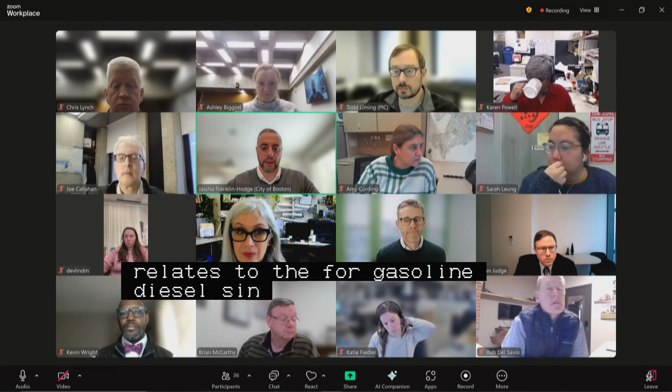Would the proponents please introduce themselves, their affiliations, and give us a very brief introduction to the project and changes as it relates to the pedestrian easement since your new business hearing. This is now 2 separate agenda items for the easement and the specific repairs, so we will start with the easement and then move on to the specific repairs.

All right, thank you, Mr. Chairman, members of the commission. My name is Brian Judge, an attorney with Wilson & Storrs. I'm joined today by Noah Maslin of Eden Properties, Brian McCarthy of RJ O'Connell and Associates, Natalie Adams of Verdant Landscape Architecture, and Rob Del Savio and Katie Fiedler of Embark Architects. Just as a brief reminder, Eden Harvard LLC is proposing a new mixed-use, primarily residential project located adjacent to Harvard Avenue in Allston, with properties having the addresses of 25 to 27 Harvard Avenue, 31 Harvard Avenue, 39 Harvard Avenue, and 410R Cambridge Street. Just by way of reminder, the project obtained Article 80 Large Project Review approval from the BPDA in December 2023.

And zoning relief from the Boston Board of Appeal in January 2024. As was mentioned, we were before the commission for new business 2 weeks ago on January 30th, requesting approvals for pedestrian easement and specific repair. So we'll take each of those in turn.

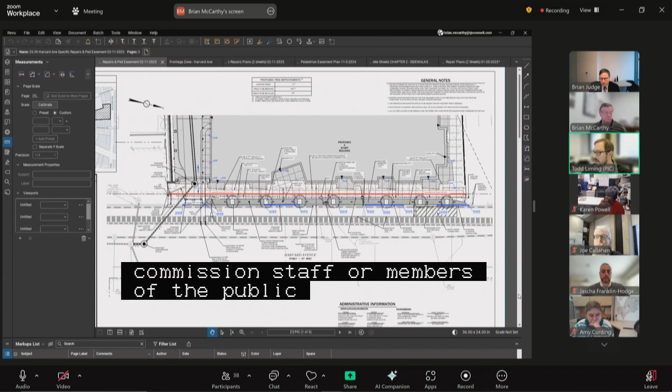All right, hearing none from the commission, PIC staff, or members of the public. I'll take this opportunity to remind the public, if you wish to ask questions or add testimony to any particular action item, we ask that you use the raised hand function at the bottom of your screen. I do not have any comments or questions on this at this time, and I don't see anybody else wanting to weigh in yet either.

So I think we're all set on the easement. All right, hearing nothing else, last call. Do I hear a motion to approve public hearing number 1?

I'll make a motion to approve a joint petition by Eden Harvard LLC, Joseph R. Sullivan 2010 Trust, and 31 Harvard Realty Trust for the acceptance of a pedestrian easement in Harvard Ave, as read into the record by the chair. Second. All in favor? Aye. Aye. Any opposed or abstain? So moved.

All right, on to the second part of this. Public hearing number 2, the joint petition by Eden Harvard LLC, Joseph R. Sullivan 2010 Trust, and 31 Harvard Realty Trust for the making of specific repairs within Harvard Avenue, Public Way, Brighton, located on its westerly side at address numbers 25 to 39, generally between Cambridge Street and Farrington Avenue, consisting of curb and sidewalk reconstruction with structural soil, as well as new and relocated specialty pavement, street lighting infrastructure, parking meters, street trees, irrigation infrastructure, driveway curb cuts, bike racks, and a bike repair station.

This was new business on January 30th, as shown on a set of plans entitled City of Boston Public Works Department Engineering Division Specific Repairs Plan 25 to 27, 31 and 39 Harvard Avenue, and 410R Cambridge Street, Boston, Allston, 2 sheets dated February 11th, 2025. Would the proponents please reintroduce themselves and their affiliations, and then give us an update on the specific repairs and specifically any changes or comments since your new business hearing.

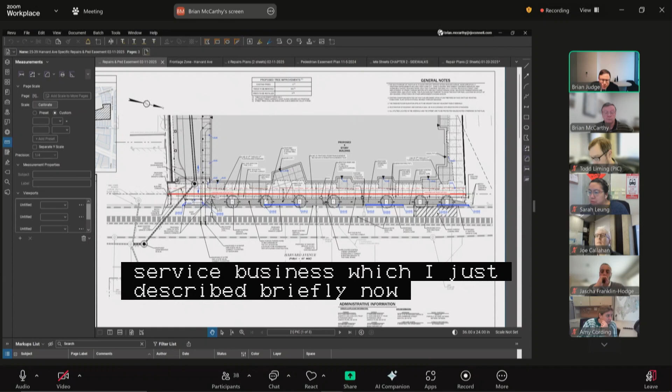So same project as just discussed in connection with the pedestrian easement. In terms of updates with respect to the specific repairs, there have been a handful or so since the new business, which I'll just describe briefly now, and then turn it over to Brian McCarthy to show you in more detail on the plans. So as requested at new business, we replaced the multiple existing parking meters along Harvard Avenue with one multi-space parking kiosk. Second, in response to comments we received from the Boston Parks and Recreation Department since new business, the openings surrounding the proposed street trees have been increased.

So with that, I'll turn things over to Brian McCarthy, again, just to walk you through the changes in more detail. Yep, Brian McCarthy again with R.J. O'Connell and Associates, Civil Engineers. So the first item was replacing the existing 4 meters with a multi-space parking kiosk. We show the location on the plan here, right in this location. And we have a note here that this will be coordinated with Boston Transportation Department during construction. So final location will get coordinated, but we show it here for now.

The other item added here was a bike fix-it station, and that's going to be right in this location here, in the furnishing zone, along with the bike racks that are all along the furnishing zone. The increase in the size of the openings in the pavers at the new street trees, that went from 2 feet square to a 3 foot by 4 foot opening as requested by Parks and Recreation Department. So those are indicated by the white rectangles here in the paver areas at the trees. So that now is 3 feet by 4 feet of an opening.

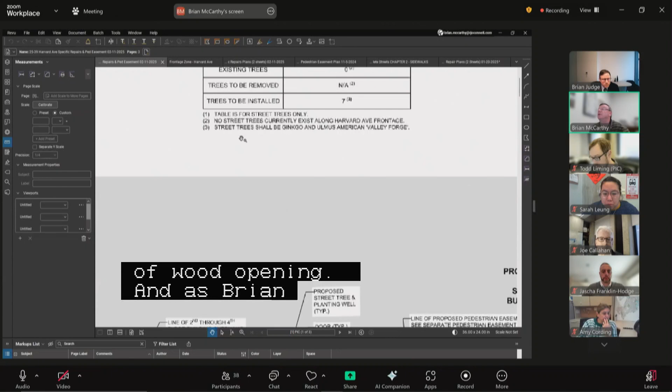And as Brian mentioned, at the request of Parks and Recreation, we added the tree species onto the plan here. We've got ginkgo and Ulmus American Valley Forge as the trees that are proposed, and they are on the city's approved list. So that's pretty much the changes made since the last meeting. Thank you very much. Commissioners, questions, comments?

All right, hearing none. PIC staff or members of the public? I'm all set on this. I appreciate the project team taking the time to meet with us last week to finalize some of these details. I see no one else. All set. All right, excellent.

Thank you very much. Do I hear a motion to approve public hearing number 2? I'll make a motion to approve a joint petition by Eden Harvard LLC, Joseph R. Sullivan 2010 Trust, and 31 Harvard Realty Trust for the making of specific repairs within Harvard Ave, as read into the record by the chair. Second. All in favor? Aye. Aye. Aye. Any opposed or abstain? So moved. We are all set. Thank you very much. Thank you.

All right, moving on to our next item, public hearing number 3 on a petition by the Massachusetts Bay Transportation Authority for the making of specific repairs within the following public ways in Boston proper and Roxbury, consisting of curb realignment, roadway and sidewalk reconstruction, as well as new and relocated pedestrian ramps, street lighting infrastructure, traffic signal infrastructure, storm drain infrastructure, street trees, bike racks, trash receptacles, bollards, wayfinding signage, and grade-separated bike facilities. Massachusetts Avenue, generally between St. Stephen Street and St. Paul Street. Huntington Avenue, generally between Public Alley number 405 and Public Alley number 820. This was new business on January 30th, as shown on a set of plans entitled City of Boston Public Works Department Engineering Division Specific Repair Plan, Massachusetts and Huntington Avenues, MBTA Symphony Station Improvements, Public Way, Boston, 8 sheets dated February 10th, 2025. Would the petitioners please introduce themselves, their affiliations, give us a very brief reintroduction to the project, and then any updates on the specific repairs component of this.

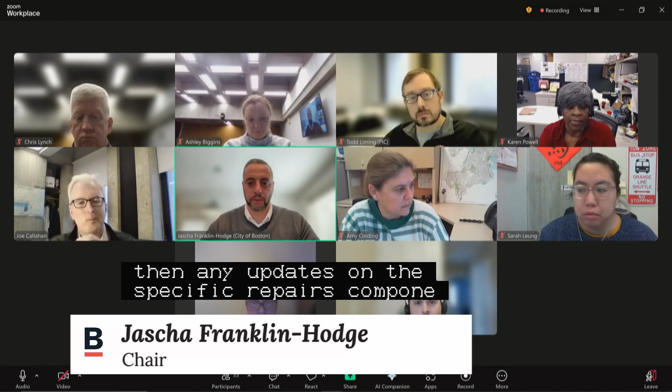There are, I believe, 3 actions related to this project on the agenda, so we'll take them one at a time, but we can start with those specific repairs.

Good morning, Commissioners. My name is Dino DiFronzo Sr. I'm the Municipal Liaison for the MBTA Symphony Station Project Phase 2. Joining me is Judd Galloway from Thornton Tomasetti. As we told you a couple of weeks ago, Phase 1, which consists of the utility relocation work, is scheduled to be completed this spring. And Phase 2, which consists of station improvements and surface improvements, is anticipated to start this summer.

There were a couple of questions at the last hearing, I believe from Sarah at Commission on Disability, and the project team has verified the ADA compliance of the sidewalks and curb cuts on the Huntington Avenue overpass, and Phase 2 will replace the 4 detectable warning strips at the curb cuts on the Huntington Avenue overpass. I also coordinated with Chung Lu on some actions that need to be taken after the approvals, and have coordinated with Todd in his office. So with that, I want to pass it on to Judd Galloway for any specific information on the first item, which is specific repairs.

Thank you, Dino. Good morning, Commissioners. As Dino mentioned, my name is Judd Galloway. I'm with Thornton Tomasetti. I'm the project manager and project prime for the design team on this MBTA station improvements project. I'll share my screen to show the specific repairs. Can everyone see my screen? Yes, we can. Okay, so this is the specific repairs project for the Symphony Station's improvements project that, as the commissioner noted, includes surface improvements for new elevators, improved stair access, emergency egress stairs. Other specific repairs include new street lights, new traffic light signage, new utility relocations, etc.

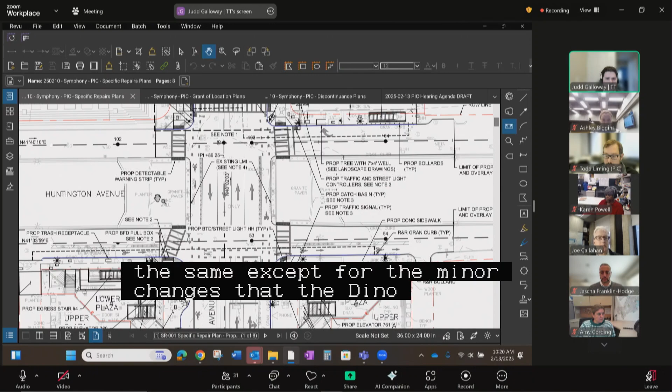The specific repair plan remained the same except for the minor changes that Dino just mentioned. We have indicated now that we will be replacing the 4 detectable warning strips on the overpass at Huntington Avenue. Other than that, the plans did not change from our meeting on January 30th. All right, thank you very much. Commissioners, questions, comments?

Hi, I'm Sarah Leung with the City of Boston's Disabilities Commission. Appreciate the project team looking into our comments and proposing those changes to replace the detectable warnings. I just asked the team to coordinate with our Public Works ADA coordinator and manager on the compliance of those ramps after the PIC hearing, just to ensure that our records match your records as well. We'll do, Sarah, not a problem.

All right, so I wanted to just flag the wayfinding signage piece of this. I think that we will, at a minimum, need an LMI to cover the wayfinding, since that's a non-standard thing for the city to be responsible for maintaining. And we probably want to talk about the other infrastructure here that is possibly something the city can commit to maintaining, like bike racks and trash receptacles, but depending upon the precise details of what's being installed and where, we may need to come to some understanding about what the city's responsibility is and what the MBTA's responsibility will be going forward.

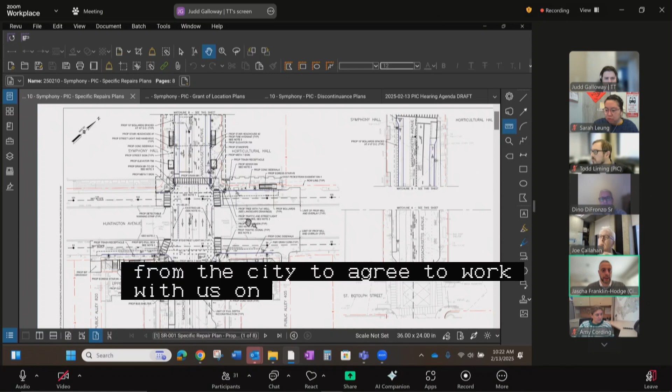So can I get a commitment from the T to agree to work with us on an LMI for, at minimum, the wayfinding signage, and to at least entertain a discussion as part of that about the other street furniture elements? Absolutely, Chief.

And I'll be meeting with Chung Wu next week anyway. I can start the ball rolling with Chung and Todd on the wayfinding piece, the LMI, and I'll keep you updated before anything is locked in. All right, that sounds great.

Much appreciated. Yeah, I think as I'm looking more closely, there's bollards, there's street trees, so we just need to make sure we're aligned on all of those elements and long-term maintenance. There's a lot happening in a very small area there, so I agree.

Very true, very true. All right, hearing any other questions from the commission? All right, PIC staff or members of the public?

No, I'm all set. The signage, the bollards, those I think are definitely going to need to be in the LMI. The tree will be up to the Parks Department, I think, but Dino and Judd, I'm happy to work with you, and Chung, after this hearing to figure out all that stuff. Thank you, Todd.

Hi, this is Christian Simonelli, Executive Director of the Groundwater Trust. Dino, good to see you. Christian, always a pleasure. Always a pleasure, my friend.

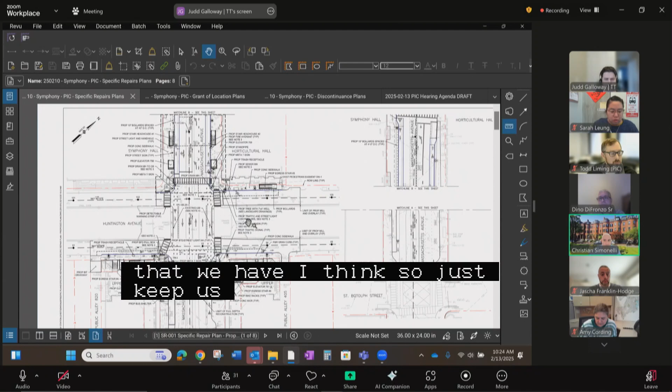It looks like some of the area that you're doing the work in contains some observation wells that we have, I think. So just keep us in mind when you're out there resetting those roadway boxes. Some of these roadway boxes are pretty old, coming up on 20 years, so there may be a case where when you go to place them back, they may just be too far gone, and we can certainly replace those and get those replacements out to you. So I would just encourage keeping an open dialogue with us as you're going through the work, and if you do need it, we'll get it right out to you.

Christian, how about you and I meet up next week and we can go over the plans and the project? Sounds good to me. All right, thank you. Thanks very much. Thank you, Chief. Thanks, Christian. Good to see you.

All right, hearing nothing else, do I hear a motion to approve public hearing number 3? I'll make a motion to approve a petition by the Massachusetts Bay Transportation Authority for the making of specific repairs in Massachusetts Avenue and Huntington Avenue as read into the record by the chair. Second. All in favor? Aye. Aye.

Any opposed or abstain? So moved. On to public hearing number 4, on a petition by the Massachusetts Bay Transportation Authority for a grant of location to relocate existing utility infrastructure within the following public ways in Boston proper and Roxbury: Massachusetts Avenue, generally at Huntington Avenue; Huntington Avenue, generally at Massachusetts Avenue.

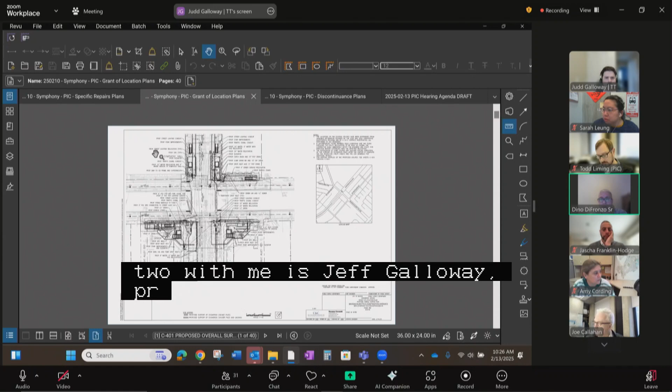I am the municipal liaison for the MBTA Symphony Station Project Phase 2. With me is Judd Galloway, the project manager for Thornton Tomasetti. I don't believe there has been any changes, but I will pass it over to Judd so he can give you the answer definitively. Good morning again, Commissioners.

This is again related to the Symphony Station Improvements Project by the MBTA. And as Dino mentioned, there have been no additional changes to the grant of location plans from our new business hearing on January 30th. All right, well, given that, Commissioners, any questions or comments? PIC staff or members of the public?

I will just mention, I had previously asked for some additional information to be added to this plan set that resulted in a 40-sheet set, which I think is maybe a little much, so we can pare down the sheets in this plan set and figure out which sheets we actually need to record. So I don't think we're going to need all 40.

So Todd, sorry about that. We'll get you just what you need. No need to apologize, I asked for it, so I got what I asked for. If it's okay with you, I'm going to blame Judd for that, all right, Todd? We're going to blow through our signing pen budget at this rate.

All right, do I hear a motion to approve public hearing number 4? Make a motion to approve a petition by the Massachusetts Bay Transportation Authority for a grant of location in Massachusetts Avenue and Huntington Avenue as read into record by the chair. Second. All in favor? Aye. Aye. Any opposed or abstain?

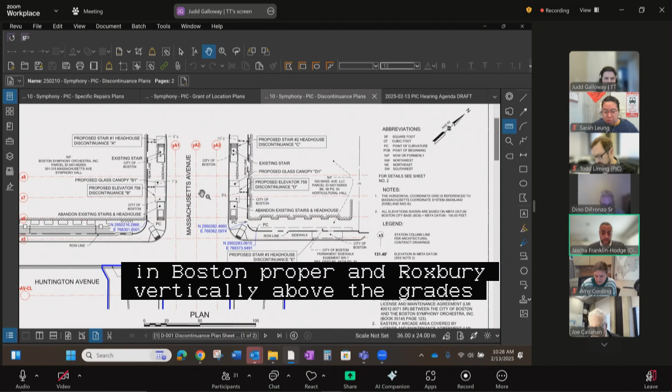So moved. All right, on to public hearing number 5 on a petition by the Massachusetts Bay Transportation Authority for the vertical discontinuance of portions of the following public ways in Boston proper and Roxbury, vertically above the grades of the sidewalks: Massachusetts Avenue on both sides, generally northwest of Huntington Avenue; Huntington Avenue on its northwesterly side, generally northeast of Massachusetts Avenue. This was new business on January 30th, as shown on a set of plans entitled City of Boston Public Works Department Engineering Division Discontinuance Plan, Massachusetts and Huntington Avenues, MBTA Symphony Station Improvements, Public Way of Boston, 2 sheets dated February 10th, 2025.

The proponents please reintroduce themselves, their affiliations, and give us an update on anything that has changed since your new business hearing. Good morning, Commissioners. My name is Dino DiFronzo Sr. I'm the municipal liaison for the MBTA Symphony Station Project Phase 2. And with me is Judd Galloway, project manager for Thornton Tomasetti. I don't believe there have been any changes from the new business hearing concerning vertical discontinuance, but I'll pass it over to Judd so he can definitively agree or disagree with me.

Thank you, Dino. Again, Commissioners, good morning. My name is Judd Galloway. I'm with Thornton Tomasetti, the project manager from the design team for the MBTA Station Improvements Project. I confirm what Dino said. The 5 discontinuances that we had proposed in our January meeting for new business have not changed and are shown on the screen here.

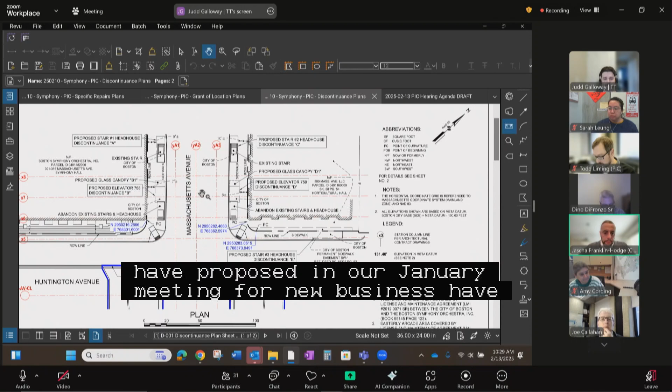Thank you very much. A question about, so two of the head houses are currently being abandoned that are being shown on this plan. Can you speak to what is happening below grade at those locations and how that is being handled from the proponents' understanding in terms of any existing discontinuance that may be by explicit grant or just by existence of a structure there, how that is being handled going forward with the abandoned locations.

Absolutely. So as you noted, we are abandoning these existing stair head houses that occur at the corners of Mass Ave and Huntington Ave at the BSO and Horticultural Hall. These stairs will be completely demolished in order to make room for the station's expansion required for the new elevators just to the north. So we are asking that the discontinuance of the property to the north of the existing head houses at these locations, where the abandoned stations will be restored to sidewalk and to the city.

Other than that, below grade, there should be no, there will be station expansion that is probably, I think, 8 feet below the sidewalk at this location for these head houses. But above grade, it will be restored to sidewalk.

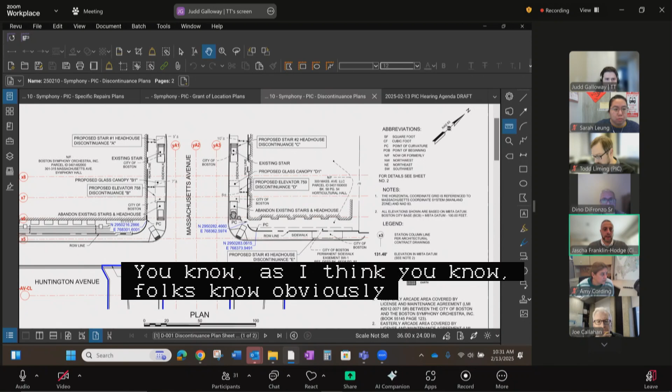So there's a larger issue here that I want to raise and maybe ask a specific question in the context of these particular locations. As I think folks know, obviously the MBTA has quite a bit of underground infrastructure in Boston, and some of it runs underneath sidewalks and streets that the city has generally been responsible for maintaining.

Given the age of this infrastructure, much of it predating the PIC process, we don't have well-kept records of where that infrastructure was located, or clear discontinuance records or other examples of having tracked the history of that space over time. This creates a challenge for us because we are charged with maintaining sidewalks and streets that sit above these pieces of underground infrastructure, and absent clear maps and documents, absent clarity on responsibilities for maintaining those subgrade structures, it can be very difficult for us to do even simple things like repairing a sidewalk, because we do not always know what is directly underneath it and the condition it's in.

What we are trying to do as a city is ensure that when there are structures below grade, areaways, or other things, as new projects come through that touch on the top side or add new discontinuances, we're formalizing maintenance responsibilities for the subgrade structures in an LMI. This ensures the city can do necessary topside maintenance work and that there's clarity on who is responsible for the below grade structures supporting whatever maintenance is needed on top. That's a big problem, and it's citywide, not just specific to the MBTA, but something we're trying to move forward with across the city.

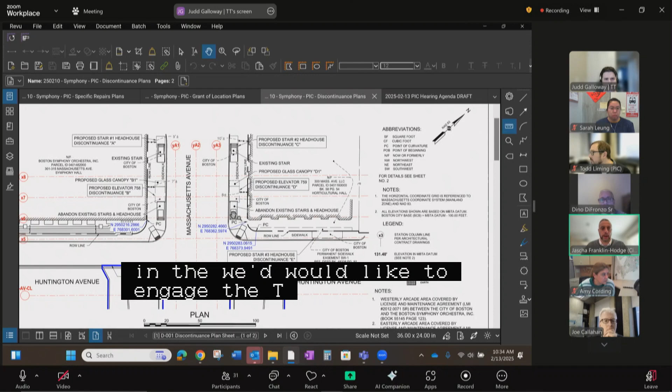My ask here is twofold. One, the city and the PIC would like to engage the T in a discussion about this broader issue in particular locations where the T has underground infrastructure impacting sidewalks, streets, and curb ramps. But the more specific ask in this location is whether we can discuss with PIC in areas where there's an abandoned structure or discontinuance that implicates a sidewalk the city would subsequently maintain, can we create an LMI spelling out the T's responsibilities for maintaining the subgrade structures so the city can perform necessary maintenance above ground? That was a long spiel, but I wanted it on the record and to confirm the T is willing to work with us on this going forward.

Chief, I'll get that to the appropriate MBTA department, and I don't see why the T wouldn't work with the city on this. So I'm going to say yes.

Okay, excellent, I appreciate that. This is something of a bigger and broader ask, so I feel comfortable moving ahead with this particular action at the PIC. I would ask that we take a focused look, particularly where we're abandoning existing infrastructure while maintaining a below-grade presence, and try to formalize the maintenance responsibilities in an LMI, but given the existing precedent, I'm comfortable moving ahead with this action today.

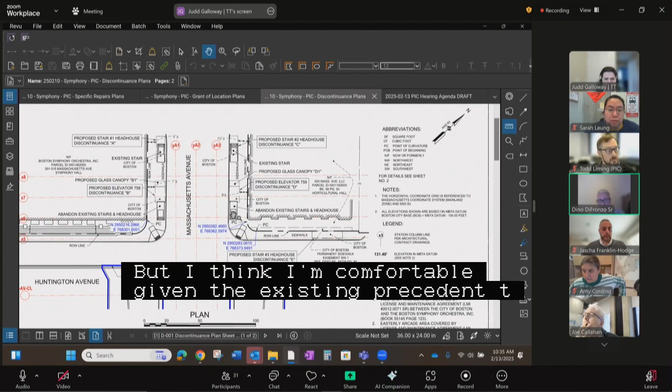We'll work on that separately. And Chief, if we could have a follow-up meeting too, because I'm not sure it's the capital delivery department that would be responsible for the engagement with you. I'll definitely get maybe the real estate department, I'm not sure, but I will track down the appropriate department. All right, much appreciated.

Commissioners, other questions, comments on the vertical discontinuance? One question related, Chief, to your comment about the LMI and maintaining a below-grade structure. Will the LMI cover snow and ice clearing and removal once this project is complete? Who is responsible for the snow and ice removal in this area?

Judd, we'll be taking ownership of the discontinued areas. I think the MBTA of the discontinued areas, yes. Absolutely, so the MBTA will own these discontinued areas, so I would imagine the MBTA would be responsible for that.

And Joe, I was anticipating that question for you after the Chief's talk, because of Government Center Station, so I knew you were going to ask that. Thank you for the answer. It's a high traffic area, a lot of pedestrians, and we want to make sure it's safe. Thank you. Yep.

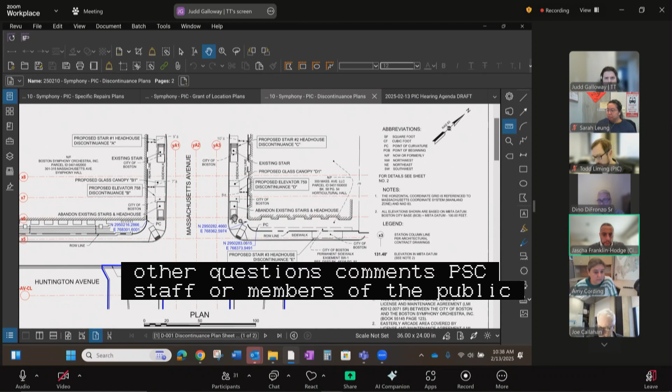I'll make a motion to approve a petition by the Massachusetts Bay Transportation Authority for the vertical discontinuance in Massachusetts Avenue and Huntington Avenue as read into the record by the chair. Second. All in favor? Aye. Aye. Any opposed or abstain? So moved. Thank you very much. Thank you, everybody. Thanks, Dino. Thanks, Judd.

All right, moving on to our final public hearing, public hearing number 6, on a petition by Verizon New England Incorporated for a grant of location with lead company status and no participants to install new telecommunication infrastructure with city shadow conduit within Armandine Street, Public Way, Dorchester, located between address number 41 and Washington Street. New business on January 30th, shown on a plan entitled City of Boston Public Works Department Engineering Division Grant of Location Plan, 41 Armandine Street, proposed conduit installation, one sheet dated December 2024. Would the proponents please introduce themselves, their affiliations, and give a brief reintroduction to the project and any changes since your new business hearing.

Yes, good morning. Ross Billadu representing Verizon New England. I'm going to go ahead and share my screen here.

Okay, just making sure everybody can see that. Yes, we can. Very good.

Just a quick overview. Verizon is proposing to place 318 feet of new conduit from our existing manhole 49A, located at the intersection of Washington Street and Armandine Street, to an existing Crown Castle shared handhole, to provide fiber services along Armandine Street. There have been no changes to this plan since the last hearing on January 30th. We do acknowledge that we will need to work with the Commission for Persons with Disabilities if any handicap spots are affected by this work.

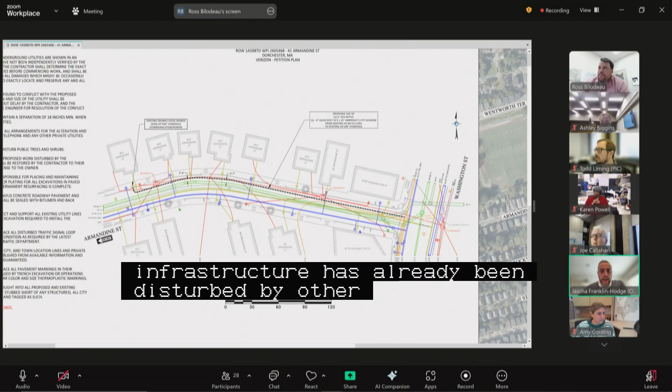There are speed limit pavement markings at the head of the street at Washington that have been obliterated, and there is at least one speed hump that would be traversed by this conduit run that has already received some damage as a result of past utility work, possibly two humps along the conduit run. I've not mapped it exactly. So the ask here is two things.

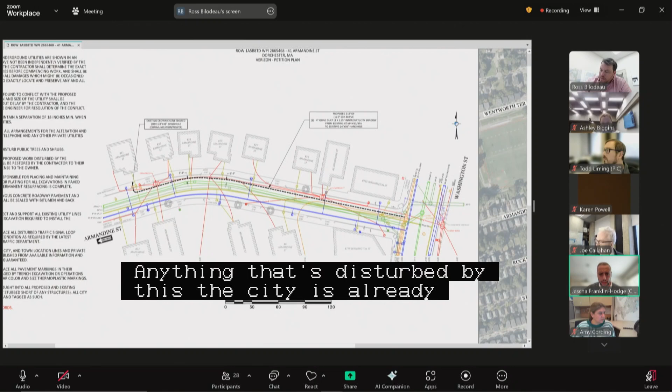First, that Verizon work with the city to receive a copy of all the pavement marking plans associated with the traffic calming that was installed here, and ensure that everything is restored fully to its intended configuration. Anything disturbed by this, the city is already planning to repaint those speed limit markings, and I'm not exactly sure where they land in the roadway relative to your conduit run, but it's likely they may be disturbed again depending upon the timing of when you do this. So making sure all those markings are fully restored.

And then for the speed hump, the city is in the process of developing formal restoration standards for speed humps. But we would like to ask that in this case Verizon commit to fully rebuilding the speed hump or speed humps impacted by this project, to ensure they are built in a consistent way and continue to function in their intended manner.

Okay. Well, sure, I wasn't privy to any of that information, so I appreciate you bringing it to my attention. I suppose if that's what we need to do to get this project approved, then I need to commit to that, so I can bring those items to my contacts running this project and make sure they abide by that. But again, I wasn't aware of any of that information prior to you telling me.

Yeah, fair enough. So I think from my perspective, I'm happy to advance this with a conditional approval on the restoration piece of this. I would also ask that we update the plans being submitted to the PIC to show speed humps. This is, again, a place where the city has a responsibility to update our standards, and this will become something we ask you and other utilities to do as a matter of course on your future plans, in the same way we ask you to show curb line and other constructed elements on the public right-of-way. Speed humps, because they are physically constructed items, do need to be shown going forward on the plans.

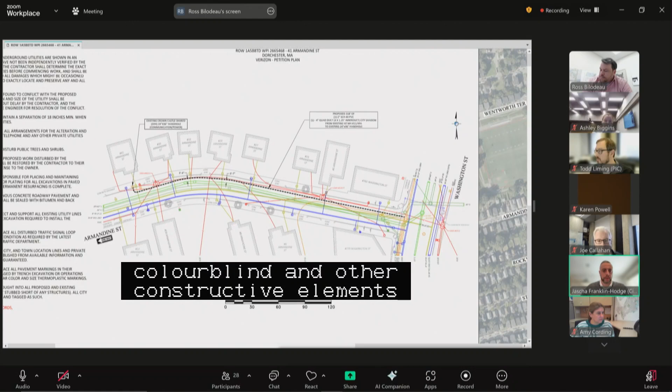Obviously that's new, we had not previously asked you for that, but we would just ask, in addition to that commitment, that you give us updated drawings showing which hump or humps are affected by this, and a notation about their restoration, before we file everything. Sure, makes sense to me, I'll make sure they start adding those. Thank you. All right, much appreciated.

Commissioners, other questions, comments? All right, hearing none. PIC staff or members of the public? No, we're all set. Thank you.

All right, do I hear a motion to approve public hearing number 6? I'll make a motion to approve a petition by Verizon New England, Inc. for a grant of location in Armandine Street as read and seconded by the chair. Second.

I'll just note that this is conditioned on the elements we just discussed about restoration and updating plans.

Do I hear all in favor? Aye. Aye. Aye. Any opposed or abstain?

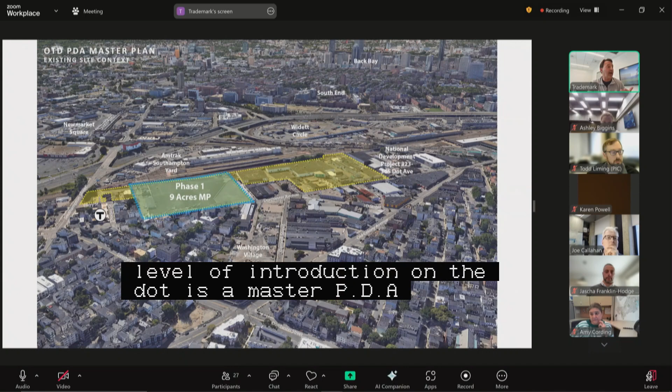Hopefully you're seeing my screen. Very high-level introduction: this is a master PDA approved by the Planning Department, covering approximately 21 acres on the western side of Dorchester Avenue, immediately north of Andrew Square Station. The project was proposed in 4 phases.

The first phase, which we're talking about today, encompasses 9 acres, again on the western side of Dorchester Avenue, and 4 buildings. The first building is 495 Dorchester Avenue, a residential building. Then there are 3 commercial buildings: 505 Dorchester Avenue, and 75 and 65 Ellery.

Within that 9 acres, those 4 buildings have gone through the development plan process and also been approved through the Planning Department for Article 80 and Article 37. Our commitment to the Planning Department was to build and receive a certificate of occupancy for a residential building first, before proceeding with any of the commercial buildings.

So our first project is the 495 Dorchester Avenue residential building, encompassing approximately 320 residential units, including 94 senior affordable housing units within that project. The specifics involve work in Dorchester Avenue, Alger Street, the creation of a new Ellery Street, and some adjustments to the surrounding public realm space.

That's a very quick, big picture overview, and I'm going to turn it over to Kevin Wright at VHB to walk you through the details of our proposal.

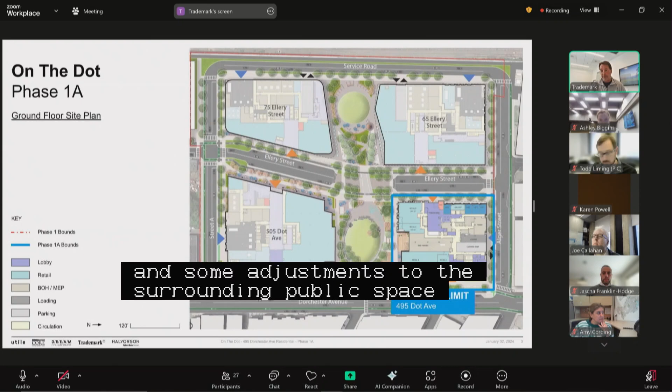Thank you very much, Mark. I'll share my screen as well. So, yes, we have mailed out our necessary — good morning again, sorry, Kevin Wright from VHB, as Mark said — we mailed out the necessary engineering reports, utility notification letters, and plans necessary for the utility agencies to review.

We've gotten all of our comments back, and with several agencies we've had meetings, including the Commission for Persons with Disabilities and BPDA, and we've met extensively with the street lighting department to talk about layout of street lights. We've also addressed comments that have come in and responded to those items, and developed these engineering plans, which I'll walk you through one at a time.

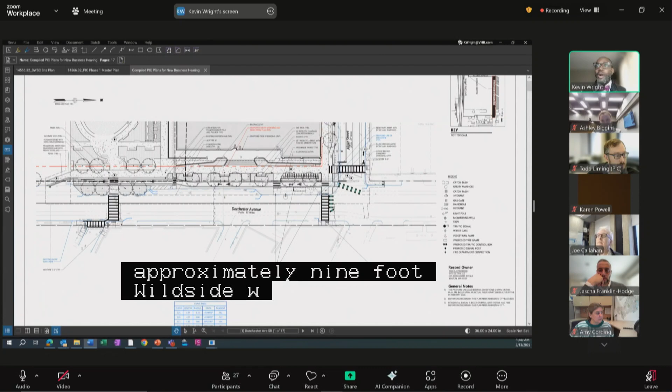We'll start with the specific repair plans. What you see right now is the specific repair plan for Dorchester Avenue. There are existing 8-foot wide sidewalks out there. The specific repair plan lays out an extension of 20 feet beyond the existing property line to provide a 6-foot bike lane, 12-foot furnishing zone, and approximately 9-foot wide sidewalk, giving an 80-foot right-of-way on Dorchester Avenue. Streetlights, sidewalks, and crosswalks will all be city standard materials, with a number of trees, bike racks, and seating elements planned for this portion of Dorchester Avenue.

At this time, do you want me to continue walking through the specific repairs for each street? Yeah, that would be great if you can just walk us through, and then we can jump back if there are specific questions. Okay.

So that's Dorchester Avenue. There are crossings planned across Dorchester to tie into what is known as East Park, which would be adjacent to the 495 building, shown here in this portion of Dorchester Avenue.

Next, we'll walk through to Alger Street, which is perpendicular to Dorchester Ave. Alger Street also has an 8-foot wide sidewalk adjacent to the existing property. With the new right-of-way that we're presenting, we're pushing it back 17 feet to provide a 5-foot wide bike lane, 5-foot wide furnishing zone, and a 9-foot wide sidewalk, giving a 67-foot total right-of-way. There are also bike rack elements and street trees along this stretch of Alger Street, and a Hubway or Blue Bike Station will also be incorporated.

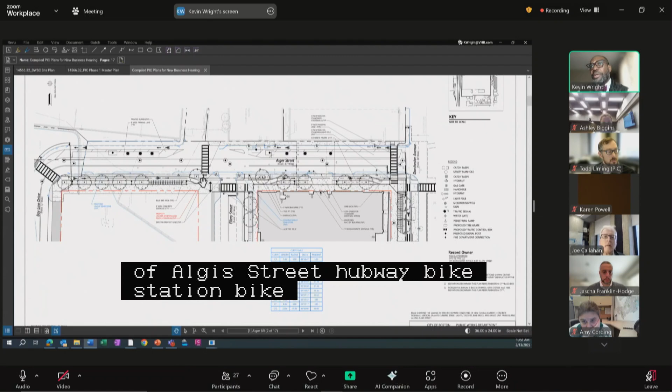Per our conversations with the Commission on Disabilities, we've added this crosswalk element at Alger and Ellery. We've repositioned this since the initial plans went out in October to better align the crossing and line up a pedestrian path continuous along the Dorchester Ave frontage.

The next is Ellery Street. Ellery Street is a new street which would have a total right-of-way of 83 feet. We've got a number of elements going on here, including 8-foot parking lanes on each side and 11-foot travel lanes.

The south side of Ellery Street has street trees, bike racks, and elements that are all going in with the 495 building. Per our meeting with the Commission on Disabilities and the BPDA, we've changed this crosswalk alignment and straightened it out, giving it a little bit more width than what was initially presented in the plans that went out in October.

We've also provided a turnaround for Ellery Street on this plan so that it does not terminate on a space that cannot get out and get back to Alger Street - the city has a turnaround element for this. You'll notice that we have bituminous called out, and per our conversations with the PIC staff, this is due to the fact that...

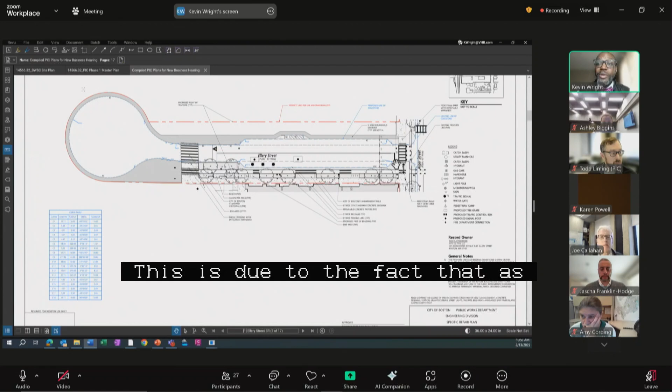As Mark showed in the master plan slides, the 65 Ellery building would be going in and would be constructed, and therefore that portion of the street and trees and elements related to specific repairs would come back at a future date when that building design is finalized.

Our last specific repair is tied to Bay Line Drive, which is just north of Ellery Street, opposite Alger, adjacent to the MBTA tracks and property line. This would have all bituminous pavement, curb, street lighting, two 11-foot travel lanes, and a 10-foot wide multi-use path. We've got a safety buffer zone along this stretch of Bay Line Drive to separate the multi-use path.

We have a configuration that allows pedestrians and bikes to get across and up to the multi-use path. We also present this turnaround, the same as what was on Ellery Street, to provide an element for getting out and around Bay Line and back onto Alger Street.

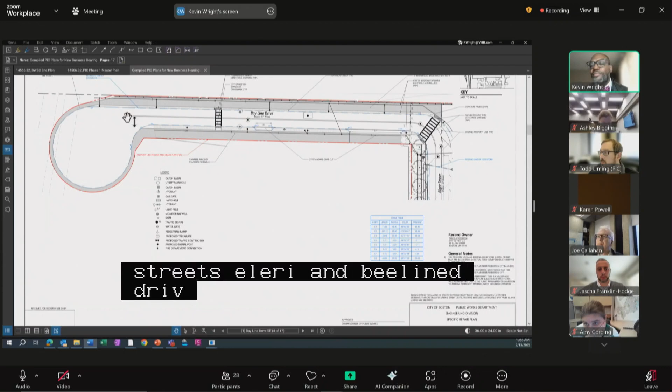In the larger scale master plan, these streets, Ellery and Bay Line Drive, extend further to the west, or Plan West, and we'll come back at a later date when those developments are ready to come forward to the PIC staff. With that is the specific repair actions. Are there any questions?

Thank you very much, Kevin. I know that there's quite a few actions beyond the specific repairs associated with this. Given the scope and scale of the project, maybe we can start with any discussion on specific repairs, and then have you come back and walk through all of the other actions associated with this, since there's quite a lot of detail in here. So I will open it up to the commission for comments and questions on the specific repairs.

All right, very good. I have a couple of questions. On Alger Street, you're showing a sort of fully constructed new southern curb with a sidewalk zone, bike lanes, and all of this other infrastructure. The northern side of the street is showing what appears to be just paint and maybe a flex post separated bike lane, but no significant changes to the sidewalk. Can you explain the intention there, and what should be anticipated for future developments on the northern side of Alger Street?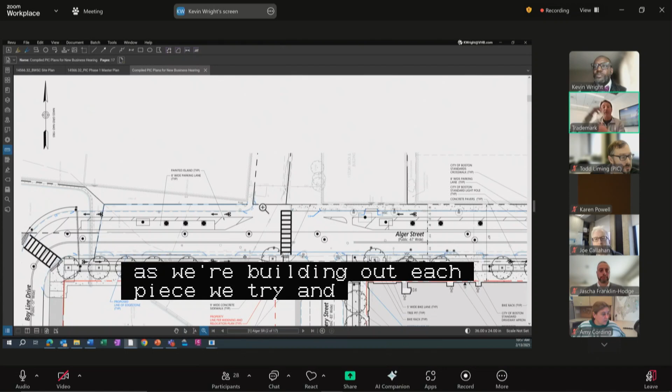So the development as a whole, as I mentioned, is 4 phases across a significant area, and as we're building out each piece, we try to manage the side of the street so as not to build new sidewalk or new trees that we would then have to tear out when we build on the other side of the street. That's why, as you saw, we're doing bituminous on Ellery between 45 and 65, so that when we build the next building, we're not spending more to throw away something that's finished. In this case, there is an existing industrial user on the other side, Karas and Karas Glass. The city, working with the Planning Department and Transportation, had talked about the complete street that is Alger, but that should not and cannot actually be installed because we don't own the property and the rights on the far side.

So we're leaving the existing sidewalk condition, which they use today. They load across it, right? Karas and Karas needs to continue to operate and fully function until such time as that industrial building gets removed, redeveloped into a new building, and then the other side of Alger Street would be brought to the equivalent level of finish that we're showing on the 495 side. So there is an expectation of a mirror image level of finish and detail and street trees.

It's just that we're phasing it, and really only able to control the southern half of Alger Street because there's a different property and a different use on the other side in the temporary condition. It's the same answer for why there's this slightly odd crossing at Alger Street. The existing public street ends, it sort of dies off today, so we want to clean that up in the interim, but ultimately the goal would be that sidewalk would continue.

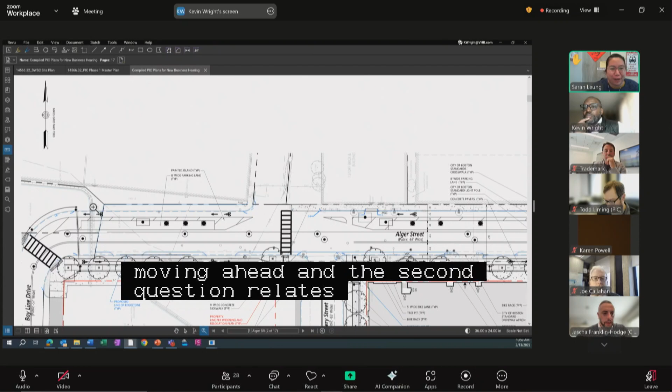This side of the street has a compliant ramp going, and this is an existing level condition. Yep, so it needs a detectable warning, and if that could be documented on the plan as a compliant ramp, providing a compliant ramp with a detectable warning to ensure that that crossing meets our city standards.

Just to piggyback on it—appreciating the desire to not build anything that then has to get ripped out, the city does have an obligation, even in interim conditions, to maintain accessibility. So if there is not a fully compliant reciprocal ramp on the north side, it will need to be constructed as part of this, understanding that it may get removed and replaced with something more involved in a future phase. But that is a baseline standard, even for an interim condition, for us.

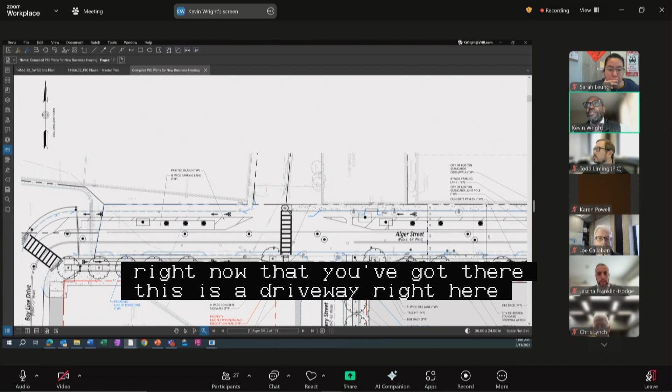Okay, we can talk a little bit more in detail, I think, Sarah, because one thing that's concerning about this is right now, if you go out there, this is a driveway right here, and this is all bituminous and level at that grade. So maybe a detectable warning here would just be sitting on a level bituminous path that gets people across, down a wide open aisle. There's no real sidewalk on this side or this part of the street here.

So it's really to get people from here to this portion of the new street, so that makes sense to have a detectable warning here. But again, it's currently in its current condition as a level bituminous area. Okay, well, please work with the Disabilities Commission in the interim to come up with a plan here. But again, the expectation is that we have a compliant, accessible crosswalk wherever we have a crosswalk, even in interim. So we'll leave it to you all to sort through the details of what that can look like here.

Second question just relates to expectations around maintenance—both capital and operating maintenance—of the sidewalk, the street trees, the street furniture, the bike lanes. Where are we with developing an LMI, and can you give a sense of how you're expecting what will be maintained, what of this new infrastructure will be maintained by the project versus by the city?

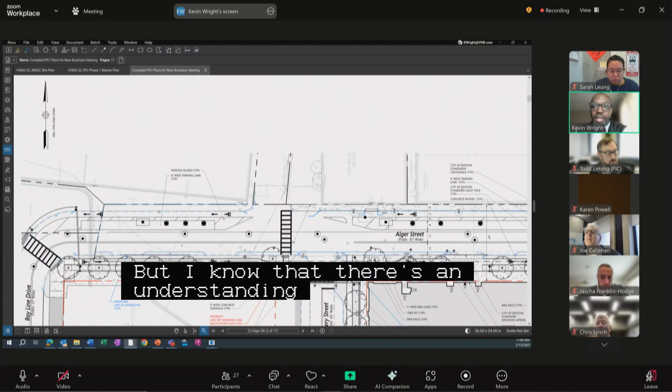So there is an LMI being developed. The team's attorney, Paula Devereaux, sent information to Chong that they're in the process of reviewing and redlining. I don't know if she's on to give details as to what they plan to maintain, but I know there's an understanding that standard materials and non-standard materials would be maintained by the development at this time.

Chief, my name is Paula Devereaux, an attorney at Pierce Atwood. I've done a series of agreements, easements, and other documentation for all of the approvals sought for this project, and sent them to Chong Lu for review. It is my understanding that the project will be responsible for maintaining the sidewalks going forward, and that the city will be responsible for maintaining the streets.

And where does the sidewalk level bike lane fit into that? I don't think we've discussed that specifically. I think I need to talk to my client about that. Mark, do you have any comments on that?

Paula, this is John. I think Mark had to bow out for a moment, but I think we could look at this together in light of the drafts that have gone out and make sure the responsibility is understood. We don't want to leave something undefined relative to where the start and stop of sidewalks and other complete street elements are, and who's responsible for it. So I think that can be detailed.

And I have a question. In prior developments where you've done the layouts of streets to be public ways, who's usually responsible for bike lanes?

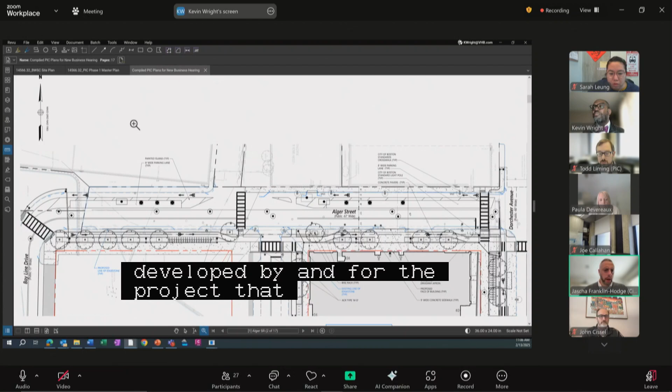It can vary, and it depends a bit on the details of the design. In many cases where there are sidewalk level bike lanes integrated into the streetscape being developed by and for the project, those have maintenance responsibilities that fall on the project for things like sweeping and plowing, as well as longer term capital maintenance. But there is some variation to that.

I think if this was to be our preference, it would be that all of the sidewalk level elements be the responsibility of the project proponents, and that likely would be our interpretation of the existing responsibilities that fall related to maintenance of sidewalks adjacent to a parcel.

But it would be good to clarify and codify that. If the proponent would like to propose that the city have snow clearing and sweeping responsibilities of the sidewalk level bike lanes, we would need to evaluate the design more carefully through the lens of our own operational constraints, which are often quite different from that of a proponent. Unfortunately, part of why many projects end up maintaining these kinds of facilities is that our requirements, for example, for clear width to be maintained to allow a plow to come through, are wider than what a project is able to do on their own. And often that has a bunch of repercussions downstream on the design of the public right-of-way.

So it typically tends to be cleaner if a project can take responsibility for all the sidewalk edge forward kind of stuff. Okay, I'll discuss it because I'm not 100% familiar with the actual design of the bike lanes.

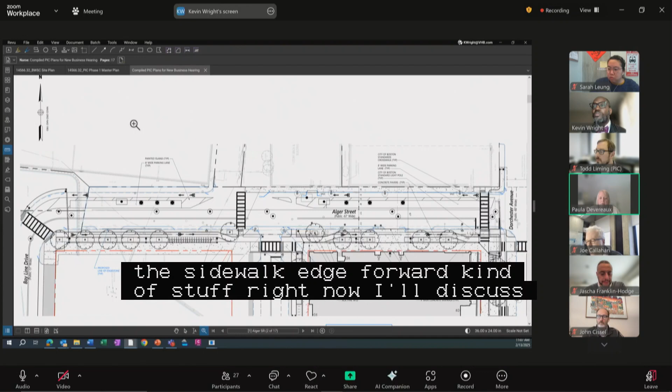And I know that they can vary by street, so I will bring that back to my client and we'll discuss that.

Excellent. Thank you very much, and Todd can help broker a conversation with Public Works Operations if there's a need for a discussion there, but hopefully this is something we can just clarify in the LMI and be set with. Great, thank you. All right, thank you very much.

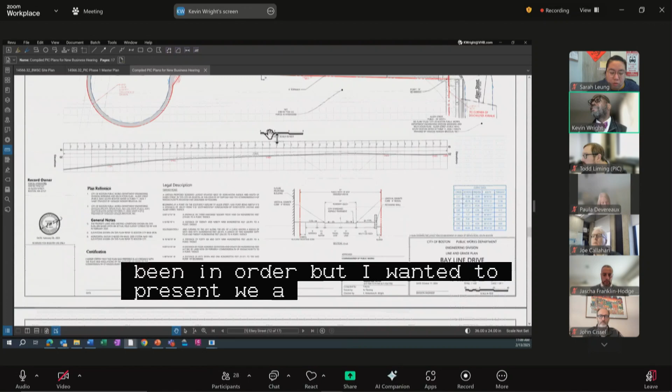Next, we also have - should have been in order, but I wanted to present - we also had a widening and relocation of, yes, Bayline, there we go. Or line and grade, Bayline Drive. Bayline Drive is a new public way, 57 feet.

And is adjacent to Alger Street. As we noted, it's to provide for a public ways turnaround and access back to Alger and Dorchester Avenue, which gets folks in and around the site until such time when Bayline Drive in its full entirety gets built out.

Then we have a line and grade plan for Ellery Street as well, to build a new public way and provide layout for Ellery Street to connect to Alger Street, providing a travel way and turnaround to get back to Alger and Dorchester Avenue. This is the interim build condition of Ellery Street until the full master plan level gets built out.

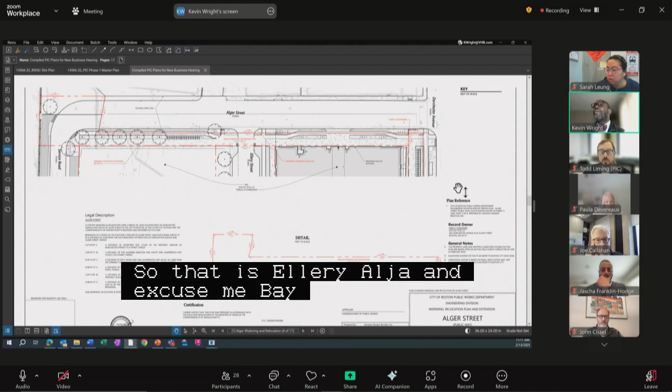Here's the Alger Street widening and relocation plan as well. It pushes us out to provide the same elements of area for pedestrian travel way along Alger Street, as well as providing bike lane, street furniture, and a furnishing zone along Alger, adjacent to the 495 building, which was part of phase 1, and the future building at 65 Ellery Street. So those are the widening, relocation, and line and grade plans for Alger, Dorchester Avenue, Ellery, and Bayline Drive.

Are there any questions at this time?

Have you, on the Ellery and Bayline turnarounds, analyzed whether a large Boston Fire Department truck could accommodate that turning around? With those streets, we've run an aerial tower truck to full turnaround and get out along those two roads. Okay, good, thank you.

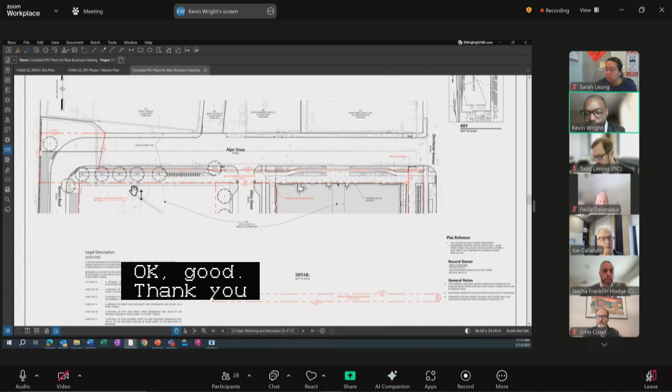Are there any other questions? Commissioners? Todd? Keep it going, Kevin. All right, all right.

So next, after line and grade and widening relocation, we have a utility license plan. This plan provides what we have in Ellery Street as an ambient loop, which is two 12-inch HDPE pipes that'll be installed for the ambient loop condition along Ellery Street and future design, as well as maintenance and installation of private drain lines that are cutting across to what will be tied to an infiltration system in the East Park, shown on a previous plan, and also a stub for future connection to 65 Ellery Street. Those are the two private utilities that will be in Ellery.

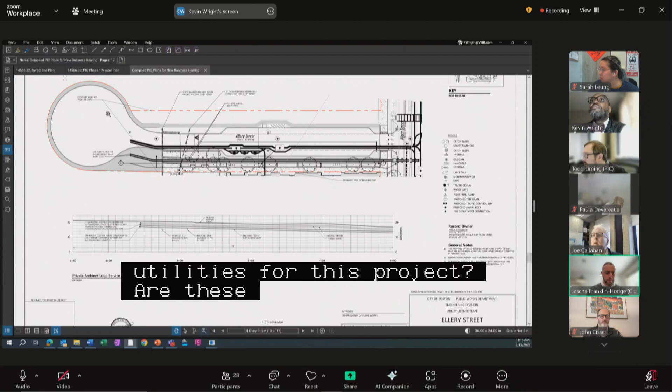Any questions on the utility license plan? Can you just provide me a little bit of clarity on what these utilities are that are being shown here, and whether this is a sort of specific utility for this project, or conduits and space that will be filled in the future by other utilities. What is being placed here?

Yeah, so in context, and we'll gray this out for the public hearing, these are standard electrical, telephone utility infrastructure shown here, planned for providing telecommunication and cable services. Those would be pretty standard, and should be grayed out in this plan to provide you context. The ambient loop is the line that's going to be privately maintained and functioning to serve as a connective service for the buildings and future roads tied to this project.

Hey Kevin, sorry, hi, I can jump in on that one. Hi, Rick Dupuis with VHB, I'm the project manager for the work we're doing with Core Investments on Dorchester Avenue. So the ambient loop is proposed to be installed. The project is studying sewer heat capture, which is a way of extracting heat from the public sanitary lines, running it through heat pumps and converting it into a source of power for the buildings. It's something in its early stages. We know that's something John Sullivan at Boston Water and Sewer has looked at, and the client in this case is trying to put in infrastructure that would allow us to use those systems in the future, should we move forward with a sewer heat capture process, without having to go in and rip up the streets and roadways to put in the infrastructure.

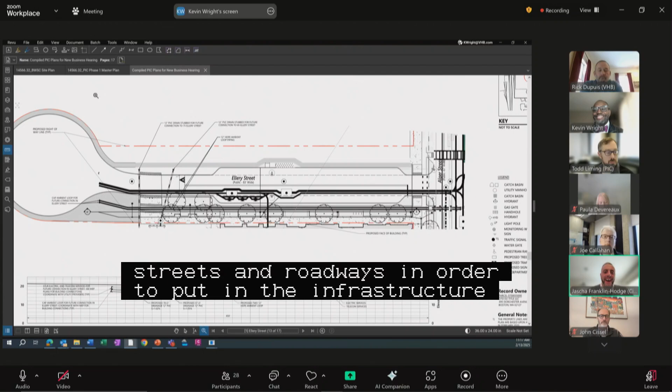That's helpful and very interesting. I guess my question, given that this is a speculative, future-oriented, preliminary infrastructure, is how confident are you in the placement of these facilities, the potential connection points, any access points that might be needed, in part because these facilities are shown underneath the sidewalk zone and therefore will be in a much more constrained location. They'll be adjacent to tree pits, and there's a question about impacts on tree root zones if these are used for heat transfer. It feels like what's being proposed is an emerging technology in a location that, depending on how that technology ends up being utilized in the future, might have downstream impacts. So I'm a little nervous about the speculative nature of this as we approve a specific location.

Yep, so it's a technology that's being used in different places.

This team went to Denver to observe a system that they have in place. We've been on the phone with folks in Vancouver that have a similar system.

The goal of the ambient loop is running water at a temperature that is not harmful to other utilities, trees, or plants. You're extracting heat from the wastewater, but the ambient loop temperatures aren't at a degree that would cause any harm or issues with the landscaping or adjacent utilities.

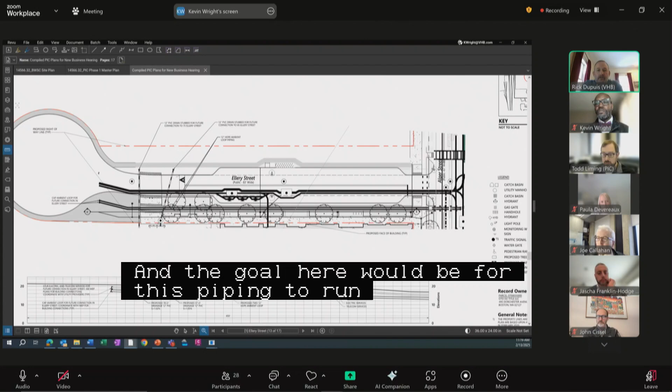The goal here would be for this loop piping to run through or be able to be extended through the entire master plan. Each building would need a little bit of work to make the connection from the loop to the building systems themselves. But we're putting the loop in a place where we're minimizing the impacts of those connections to the buildings, as opposed to moving forward with development and then needing to rip up the entire right-of-way of Ellery in order to come back in the future and install that infrastructure.

The chances of it moving forward, I'm not sure - it's really hard to put a percentage on it. It's a utility or facility opportunity to use renewable energy to create some power opportunities for your development. But it is forward thinking and something that the client has and will continue to explore as an opportunity to provide power to these buildings.

Thank you for that, and not intending to suggest that this technology is fully speculative - it's more, and I appreciate that it does exist elsewhere. I think what's being shown here is a reservation of space and a placement of infrastructure to support a potential future investment of something that is not yet fully designed, and that gives me some pause, given that the locations of those interconnection points to the buildings are not defined at this point.

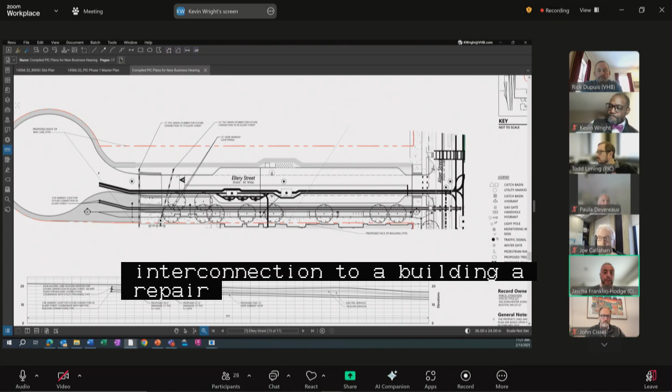With a system that hasn't been fully designed, you always hope the infrastructure you place today will support the eventual system, but a discovery that the diameter of the pipes is insufficient, or that additional insulation is needed, or that an interconnection is needed, could potentially require this to be dug up. Any digging here would be even more impactful than if this was placed near the center line of the roadway or along the western curb edge of Ellery Street. If it was sitting up along that western curb, I don't think it would be causing me much in the way of heartburn.

Just recognizing that it may get used, it may not get used, and its use would be similar to any traditional utility infrastructure. The issue is that it's placed in the sidewalk zone, near street trees, and we don't know how it will be used in the future, if at all, and how much digging or other disturbance might be required. So my question is, can this be placed in the street where we at least know the shape of the impacts if and when it's dug up or interconnections are made?

I'm glad you asked that question, because what you don't see here is a complete picture of street utilities once we add in sewer and water and all the other utilities that need to be installed to complete the project. Meeting Boston Water and Sewer standards and other utility standards with respect to where they want placement of their utilities - sanitary in the middle, minimum 10-foot offset for water, our drainage infrastructure, et cetera.

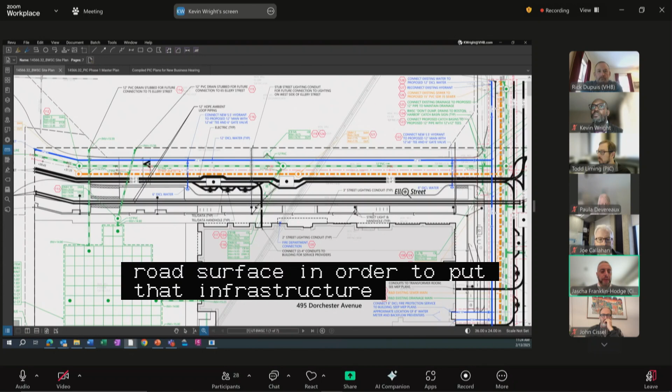Even with the 3 dimensions that you have to work with in a street, you don't want to stack utilities here for a couple of reasons. It requires you to either shut off or eliminate any utility if you need to get to the one that sits below. Also, this site is highly contaminated, so as part of the project, Core Investments is going through a significant remediation effort to either remove contaminants completely or cap them in an AUL situation.

Limiting depth is important for us for all of the utility systems running through the project, both in what sits in Ellery or anything in the future development parcel. My sensitivity is really to a stacked utility condition where if you needed to get to the underlying condition, it's a real challenge because you need to remove or find a way to support the utility that sits above in any repair condition.

Got it. Okay, I think this needs a little bit more further discussion, and we can perhaps work on this in between now and your public hearing. Certainly.

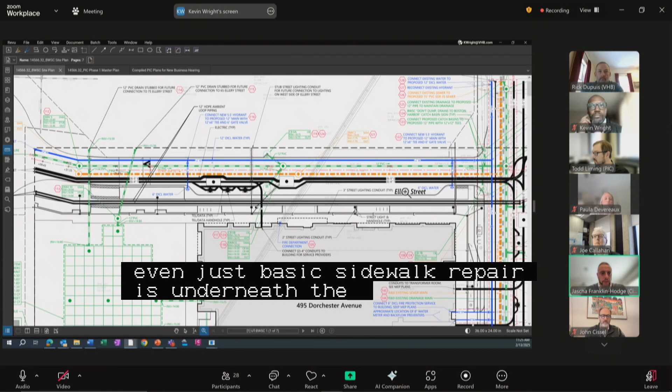Were this infrastructure to be located here, we would of course need the proponent to take full responsibility for all future capital maintenance related to the space surrounding it. We would not want to have capital responsibilities for even just basic sidewalk repair if underneath the sidewalk is a sort of bespoke piece of heating infrastructure. So that is an absolute baseline.

But I remain particularly concerned about the potential tree impacts of this in the future, given the uncertainties around what the system will be and how it will be modified, and its location directly adjacent to multiple tree pits.

It's one thing to say rip up a piece of sidewalk to make a connection or fix the pipe and put it back the way it was. You can't do that with street trees, right? If 10 years go by, the trees have grown, and they're damaged as a result of the need to do linear excavation along the site of this location, you're going to end up losing 10 years of tree growth and all that comes with that.

So it feels like a high stakes place from that perspective to put infrastructure like this that doesn't have a clearly fully designed out purpose with a well-established maintenance history as we would have with more traditional utility infrastructure. I'd like to explore how, if we're going to do this, we can structure it so impacts for any future work are minimized, particularly on the trees, but also on the more complex and expensive stuff that sits on the sidewalk portion of the street.

So that's something that our team can continue to discuss with you in the next couple of weeks and hopefully find a way to manage this. Okay, yeah, thank you, all great points.

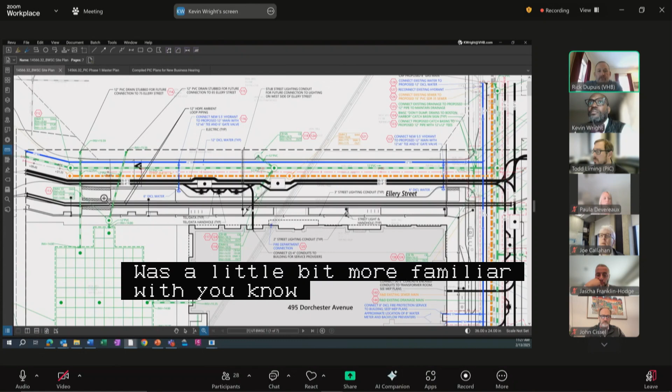I think on our end we'll bring in the landscape architect who's reviewed our layout with respect to how they think the trees or planting zones would be impacted, and also the MEP engineer, who's a bit more familiar with the piping systems and the temperatures that would be required to run this loop and extract the heat for that future building use. So I think that's a great suggestion.

Thank you. All right, Commissioners, any other questions or comments on this, Todd? Or we can keep going to the next actions. Keep going. Great, all right.

Just for context as well, this is our current site plan under review with Boston Water and Sewer. You can see these are the 2 private drain lines that connect to an infiltration system underneath the East Park that I was referring to. These are the 2 ambient loop lines which would run not under any of the concrete or brick elements, but underneath the bituminous bike path along Ellery Street, just to give context.

All right, and next is our license plan for a canopy projection on Ellery Street. It's tied to the doorway that comes out of the 495 building at this location on Ellery Street. In its current location, it's about 11 and a half feet above the sidewalk.

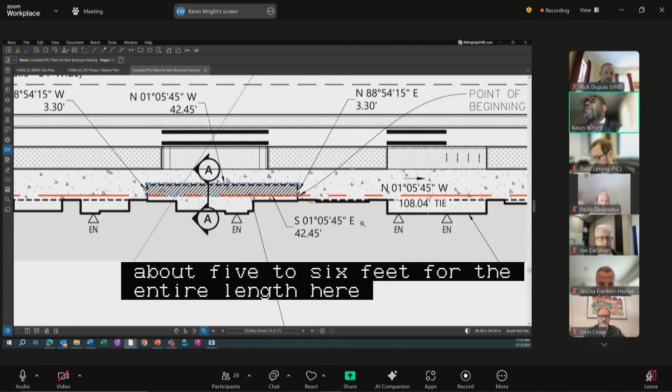We've got a zone shown on our plans, 2 feet by about 5 to 6 feet for the entire length here. As you can see in plan view, I'll zoom in. We've got the 3 foot zone by 2 foot, 2 foot, and 2 foot in height by 3 foot depth out into the sidewalk, with a 42 foot zone along the building edge for this canopy. It will be heat traced and internally drained.

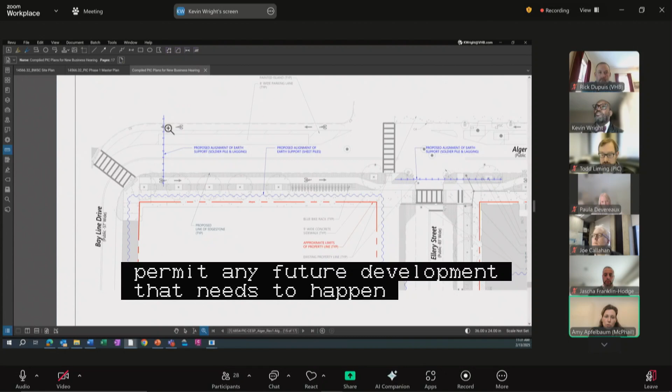As we look to the north across Alger Street, there is some soldier pile and lagging shown here, as well as a little bit further down Alger Street. This is not part of the building construction, it's really to facilitate more of the remedial excavation. There are areas of the remedial excavation that roughly need to extend about 7 feet or so below grade, and this is just to provide some protection during those excavations. Similarly, the wood lagging will be removed at the end of the remediation and site work, and the soldier piles will also get cut down.

South on Ellery Street, and I think we can see this a little better on the next plans. This area is where the steel sheeting is meant to show. Yeah, thanks, Kevin, this is a better picture. So this also shows really a lot of the limits of the remedial excavation that requires some earth support because of the depths of the cut. You'll see there's kind of a unique shape to this, which isn't typical for below grade building construction, but it steps because it outlines the limits of the remedial excavation.

Same thing, it will be cut down at the end of the project. And the reason that there looks to be some separate cofferdams is because there are different phases of this work that the remediation will happen in. So we're looking on the south side of this page where we cross Ellery Street. This work gets done as part of the 495, more building excavation and remediation, and there are a few different phases that connect these different cofferdams together.

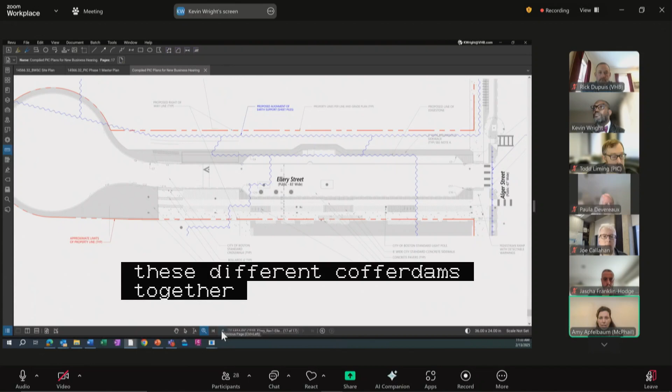There's another shot of the same work on Alger Street. And I think, Kevin, if you want to flip back to the sheet that's Bayline Drive. Yeah, and then the bulk of this sheet is really presenting the limits of the sheeting that's going to outline 65 and then a future 75 Ellery Street to allow, same thing, the remedial excavation and the future below grade building excavations to happen.

So that outlines what we have planned for the earth support. Does anyone have any questions that I can answer?

Not a question, just a comment that we cut down sheeting to a greater depth in roadways than we do in sidewalks. So the depth that all these things will need to come down to should be identified and separated based on sidewalk versus roadway. Sure, we'll identify that. I think what maybe makes sense is we'll outline where we're in sidewalks versus the streets, and show it in a different demarcation about those different cutoff levels. Great, thank you. Yeah, 6 feet below sidewalks and 10 feet below roadways. Yes. We'll have that addressed on our plans for the public hearing, as PIC staff has provided some additional notes to these plans that we have presented at the hearing today.

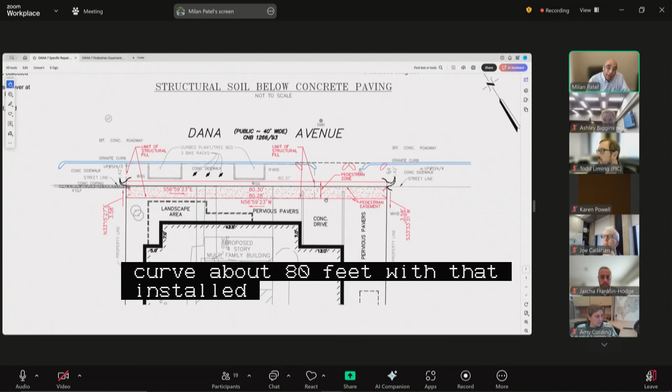The development was 27 units, multi-residential. As part of that development, we're coming in front of the board to request approval on repairs to remove and replace the granite curb about 80 feet, installing 2 curb cuts, one allowing access to below-grade parking, approximately 10 feet in width, and the second curb cut allowing access for a zoning-compliant loading bay, approximately 12 by 25. Also inclusive of that is 2 tree beds and 3 bike racks as part of that process.

The existing utility poles on both sides will remain, along with the hydrant. There'll be no changes to that. What I want to talk to you about later is why we have the easement request, because of these bike racks - they project a little bit further into the public realm. We believe we need 3 feet off those bike racks to allow 5 feet of a pedestrian zone that encroaches into the private property. Hence, we have to provide an easement of about 3.5 feet. And that's pretty much it. I'll take some questions from the board.

Commissioners, questions? Hi, thank you so much for the presentation. We just ask the proponent to add dimensions at the pinch points for clarity, to show that minimum 5-foot path of travel. Thank you.

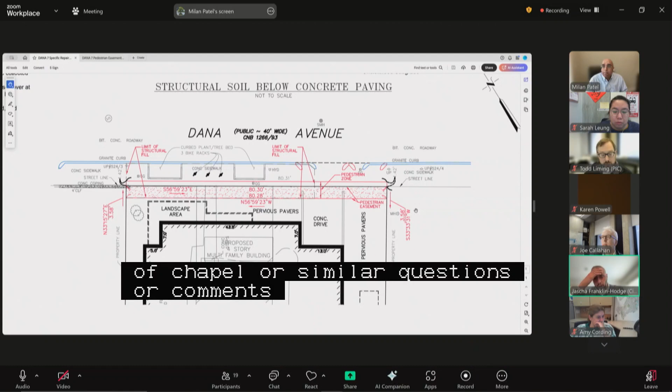All right, other questions or comments? All right, I'll just note that the double driveway condition, the double curb cut condition isn't something we typically like to see for a smaller scale project, but understanding that in this case it serves a very specific set of distinct needs and uses on the property, and that was part of the zoning and Article 80 process, to come to agreement on the site uses, and that necessitates 2 curb cuts. I think it's certainly a thing we can allow, generally a thing we would like to avoid at this scale. But...

All right, hearing nothing else from the commissioners, PIC staff or members of the public? No, one thing I will flag - one of the comments I gave to the project team a couple days ago, we need a dimension from the new curb cut to the utility pole on the east side or east edge of the project. Depending on what that dimension is, if it's less than 5 feet, we'll need written approval from the utility pole owner just to ensure they're okay with your driveway being that close. So that may be a little bit of extra homework for you in the next 2 weeks. Will do. I believe the pole is owned by Verizon, but we'll close that loop. Great, thanks. That's all I have.

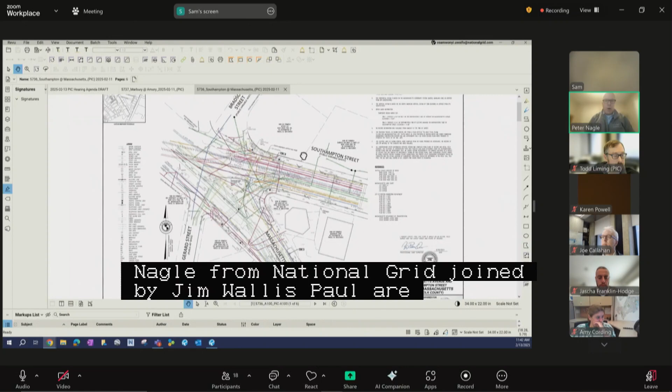What you have before you today is a long road that we've worked on with Todd Liming and PIC staff. They've been quite helpful in direction, feedback, and participation with us, and for that we'd be remiss if we didn't thank the staff.

This proposal is looking to replace an existing station presently at Bradston Street at the corner of Southampton and Theodore Glynn Way. That facility serves about 11,000 customers and has been identified by our project team as aged, and we'd like to get that out of the ground to install an updated station with the double vaults that you see in the sheet below.

Relative to the location we've chosen, working with PIC staff, our easement folks reached out to numerous sites which would have removed the facility from the public right-of-way. But those easement explorations, with the Roundhouse Hotel, McDonald's, and the car wash at Southampton, were all unsuccessful. So we came back and, working again with PIC staff, came up with this sidewalk location on Southampton.

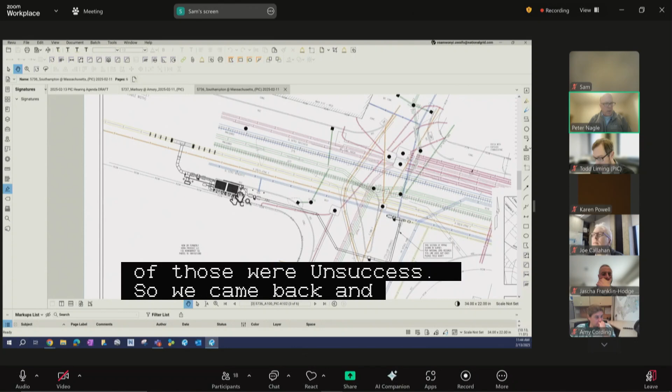The work we'd propose would be to install the station in the sidewalk and then install both inlet and outlet piping. The inlet piping, roughly 100 feet of both coated steel and plastic, going to Theo Glynn, and then the outlet piping would be about 40 feet of coated steel going to our existing main in what I'll call the parking lane of Southampton Street.

We'd anticipate, with requisite restoration and such, working any of the operational activity, probably about 12 weeks for the project in its entirety.

This would be a job we couldn't really look at doing until at the earliest the April timeframe, obviously coming out of the moratorium, but also because of station implications with the colder weather.

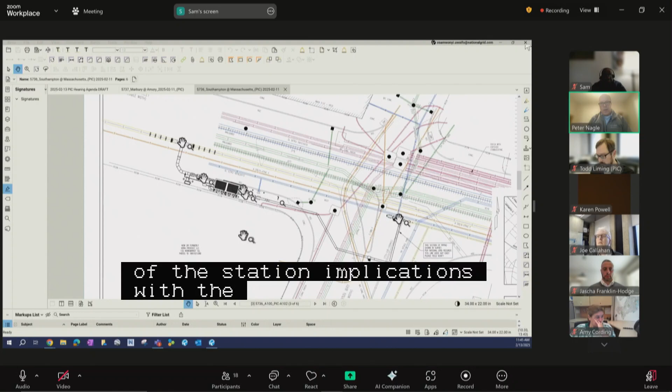That gives us plenty of time to reintroduce the project to our abutters, specifically the fire department. Anytime we work in the area, we work pretty closely with Sue Sullivan, the executive director of the Newmarket Business Association as well. With that, I'd be happy to turn it over to anyone else for questions and comments.

Thank you, Peter, and appreciate you doing that advanced coordination with some of the key neighborhood stakeholders and abutters. I guess one question somewhat related to that: recently the lot that abuts the sidewalk area that I believe is used by United Rentals has had privately installed fencing.

That fencing kind of comes into the sidewalk zone in that area, and I'm wondering, I'm not sure of the current condition, but I'm wondering if you've coordinated with that particular abutter around any temporary fencing they've installed that can be managed during construction.

We can take a look at that. I believe this sidewalk will allow for the installation of the vault without infringing upon any existing facilities.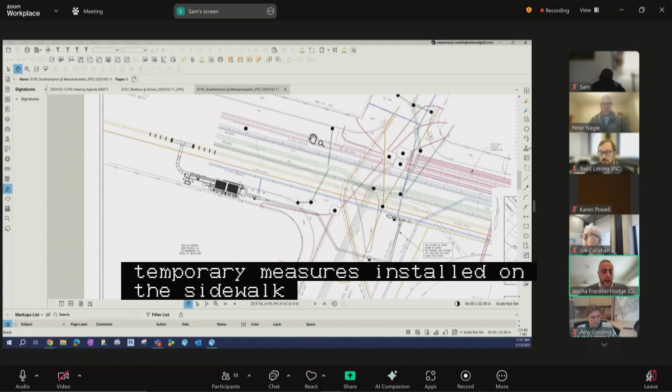So I just ask that you work directly with that abutter so there is a clear plan for what will happen during construction and how to manage any concerns they have. If fencing needs to be removed even temporarily, they're going to want close coordination with you on that.

Absolutely, not to step out of bounds, but our next proposal will address something quite similar. Okay.

And then I guess my other question relates to the inlet side of this. I'm seeing what looks like some kind of new structure underground, and the thing I just want to flag here is that this area of Southampton and Theodore Glynn Way is part of a triangle of intersections that have extraordinary safety challenges from a vehicular and pedestrian perspective.

The city is looking at how we can potentially redesign this infrastructure, as there's a missing crosswalk desire line, actually multiple missing crosswalk desire lines, at this intersection as well as elsewhere in the surrounding area. And the traffic island that currently sits in the middle of this intersection, while perhaps appropriate for managing traffic, will likely need to change to address pedestrian needs and other safety considerations.

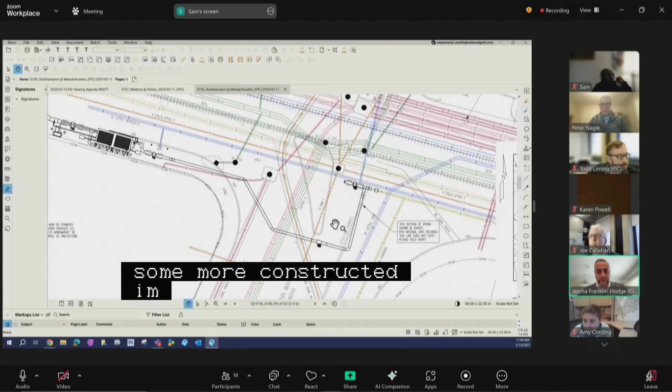So understanding there's already a lot of infrastructure under and around that island, it's always a bit of a red flag if I see something new coming in a place where we might need to make more constructed improvements in the not too distant future. I'm trying to understand what that is, the thing that runs parallel to the Southampton Street roadway next to the water line, right there, and whether you foresee, if the traffic island was removed or rebuilt, that creating any conflicts with whatever is being put underground as part of this project.

Chair, I'd like to have my design engineer, Sam, answer that question for you. As you know, I don't have much of an engineering bent, so I'd like the experts to speak.

A quick question for you, sir. Are you planning to remove this, rebuild it, or remove it permanently? We don't currently have a design, so this is a future project, but the expectation would be that the curb line geometry here would likely change to accommodate pedestrian crossings for slower and safer crossing points. I would expect some constructed element would probably end up remaining at this intersection, but we don't have any specific geometry or dimensions at this point.

So this is an existing gas main, and it will not impact any proposed infrastructure work you want to do in that area. The only thing that will happen is that during construction, we'll work closely with the city to make sure that, depending on depth, the gas mains are normally about 36 inches deep. So we wouldn't have any direct impact to your construction, no sir.

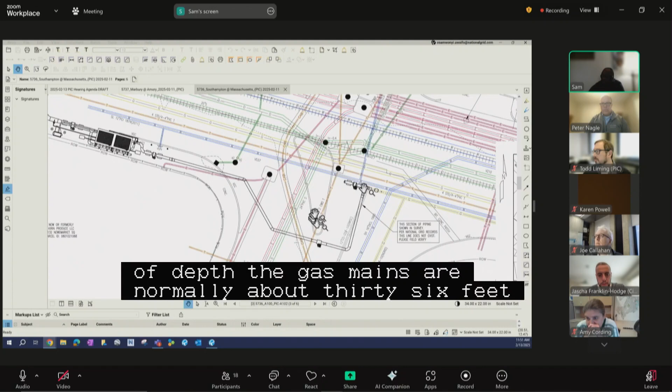Okay, excellent. So I wasn't sure what this structure shown in black here is. That's an existing 12-inch main. There's a Williamson fitting to stop the main, then a full T-tie to run the main, the inlet into the station. Then we just put a valve here in case in the future we want to extend down Southampton Street. We keep that stop piece available as an opportunity in the future.

I got it. So that's what's being added there, is that valve? Yes, sir. Okay. All right, no other questions from me, commissioners?

I was wondering if the project team could clarify the pinch point dimension that's created by the vent post, the dimension between the vent post and the back of curb. So the sidewalk right now is 9 feet 4 inches. From the front of the traffic box to the front of the sidewalk is 7 feet 4 inches. The vent poles are at the back of the vault, these are bollards here, and it's 6 feet 7 inches from the sidewalk.

Is there any signage on the curb line that might make that dimension smaller? Not to my knowledge, no. If we could just confirm that to ensure we have an accessible path of travel around the box, as well as putting some dimensions on the vent posts that are above grade on the vault, I think that could be helpful. No problem, absolutely.

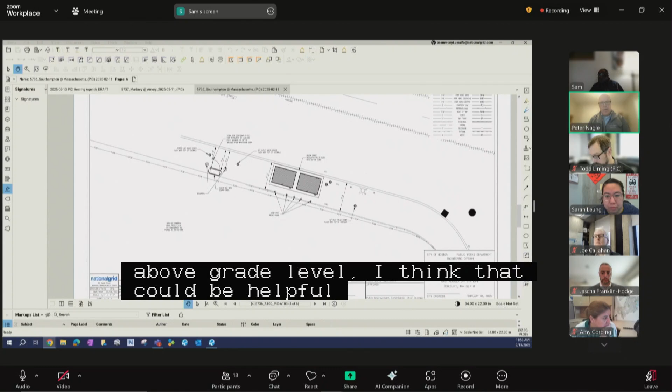And then Sarah, as well, those Bilco doors will obviously be part of, I'm going to call it the pilot program, but as we both know, I think your department is now comfortable with calling that the permanent structure, if you will. Yeah, with the slip resistant covering. Correct, that's correct. Thank you.

All right, any other questions, comments on this? Okay, hearing none, will you be ready for your public hearing in 2 weeks on February 27th? We plan to be. All right, excellent, we will see you then.

Thank you. And on to the next item, the last item on our agenda, new business 4, Marbury Terrace, Amory Street, Jamaica Plain, grant of location on a petition by National Grid. Would the proponents please reintroduce themselves, their affiliations, and walk us through what is being proposed here? Good morning, Mr. Chair, members of the Commission, Peter Nagle, National Grid Community and Customer Management, and I'm joined today by Sam Oifo, who is our presenting and sponsor engineer for the proposal before you at Marbury Terrace and Amory Street in Jamaica Plain.

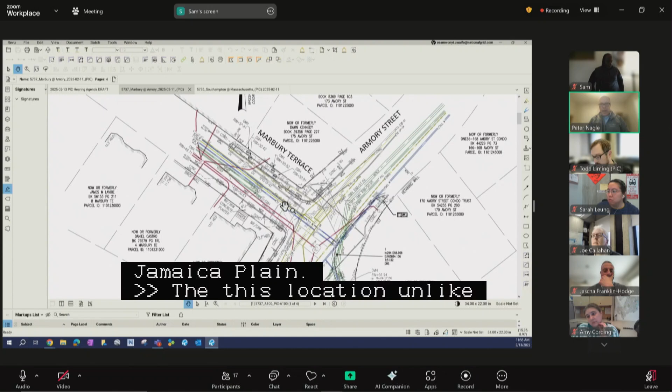This location, unlike the previous, didn't lend itself to a lot of exploration on easements. So what you have before you, working with PIC staff, is a replacement of an existing low-pressure gas regulator station in the sidewalk on Marbury Terrace with a new facility. The work would entail decommissioning the existing station first. The station serves about 5,100 customers in the immediate area, and it's again a low pressure station that we're looking to replace, providing better service for the customers as well as better and safer access for our workers who regulate those stations. Again, a facility that we have determined has reached its current shelf life, if you will.

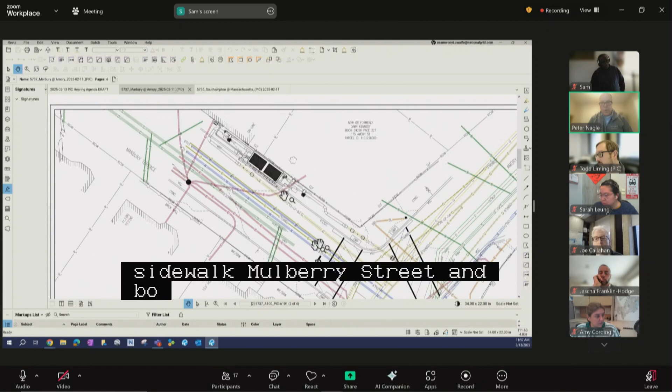This facility would remain in a two-station vault in the sidewalk on Marbury Street, with both the tie-in and outlet piping being coated steel within Marbury Street. As I said, we'd need to decommission the existing site first, then install the vault in the sidewalk. To the question about the fence line, the existing property at the corner of Marbury and Amory has a fence along its property line. In investigating this site, our easement folks have determined that we will replace that abutter's fence during our restoration, because it's right on the sidewalk line.

Couple of notes here: the facility would be, in terms of outreach, adjacent to an existing Northeastern property on the left side sidewalk. And hearing from your cabinet, Chief, we will be including this in a detailed discussion when we go to neighborhood services prior to our construction season.

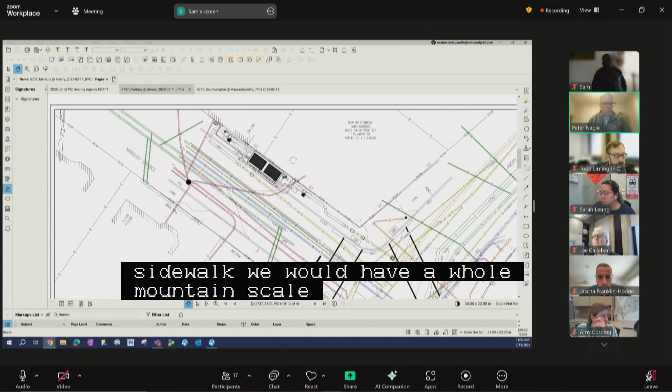Because this would require decommissioning the existing system, if we receive permits and such, we wouldn't be able to start until likely May or thereabouts, due to the decommissioning prior to installing a vault. We'd anticipate the restoration on both the sidewalk and the abutter fence to take roughly 10 weeks. Again, the Bilco doors would be the agreed upon slip resistant type. And because of the tighter nature of this sidewalk, we would have a pole mounted SCADA box instead of a traffic box for this facility.

With that, I'd turn it over to Commissioner staff members for their comments and questions.

Thanks, Peter. My first question relates to 175 Amory Street, this residential property on the corner. What engagement has been done with this abutter, given the substantial effects this will have to the edge of their property? I'm also interested in the tree shown here, in their yard. It seems very likely that the substantial excavation work here is going to impact the root zone of that tree. So I'm interested in how that potential suite of impacts is being managed with that property owner, and how you intend to work with them to make sure any damages can be fully restored.

Sure. Our real estate and siting team has had discussion with the property owner relative to the replacement of the fence. Any sidewalk or excavation work relative to the tree would probably need to be hand dug around to see what root system would be salvageable, and then we'd have a discussion with the owner relative to that.

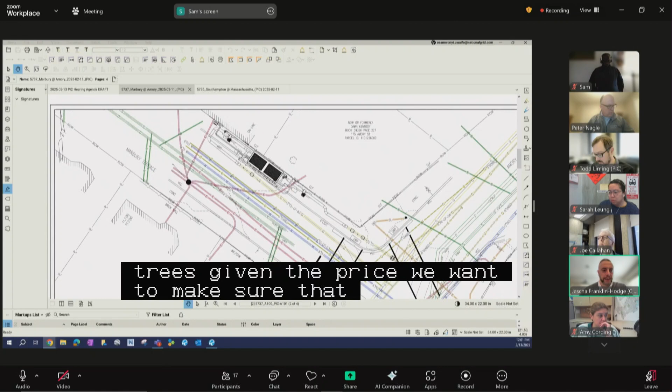Okay, appreciate that. Obviously we're officially mostly concerned with street trees, but given the proximity, I want to make sure this neighbor is well communicated with, that their interests on their land are protected, and that you guys are being good neighbors as you do this work. So appreciate the attention to that.

Related to the conversation we had with Verizon on Armandine Street, I believe the city recently installed speed humps in this area, on Marbury and neighboring streets. I'm not sure if any of those are impacted by this, but is that something you have knowledge of now? And if not, please look into that between now and your public hearing, and we would expect a commitment to fully replace any speed humps and associated pavement markings that are impacted by this work.

Absolutely. I had eyes on this yesterday, and I walked it, so I can't say definitively that there were speed bumps in that area, but none stood out to me, Chief. But I will make sure that that is both cataloged and replaced in kind if necessary.

Thank you very much, Peter. Those are my things. Commissioners, other questions, comments?

I was wondering if the team could expand on any impacts to the ramp at the corner, and whether or not the infrastructure will impact accessibility of these crossings.

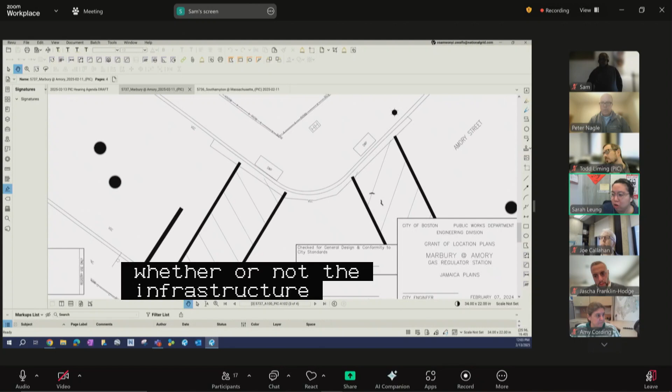No, it will have no impact on pedestrian crossing and movement in this area.

I was wondering if the team could also go over the pinch points on the sidewalk, for the record. Yes, we've done our review, and it's fully compliant with CMR 521. That's why we're using the pole-mounted Telescada box. The distance between the back end of the vent pole to the front of the curb is 6.4 feet. Then this is the Telescada box over here, from the front of it to the front is 5.6 feet.

What about the bollards that you're putting in front of the box? This one here. Yeah, on the plan I'm looking at, you also show bollards in front of them.

So it's pole mounted, pole mounted and elevated. It's elevated from the ground. It's going to be like a 4-inch pole with a Telescada box attached to it.

Okay, there's two sheets in the plans I'm looking at, and one shows something different than the other. I think one shows a box with 2 bollards in front of it, and one does not show bollards. So if there's an error there, I will have that updated and sent to you.

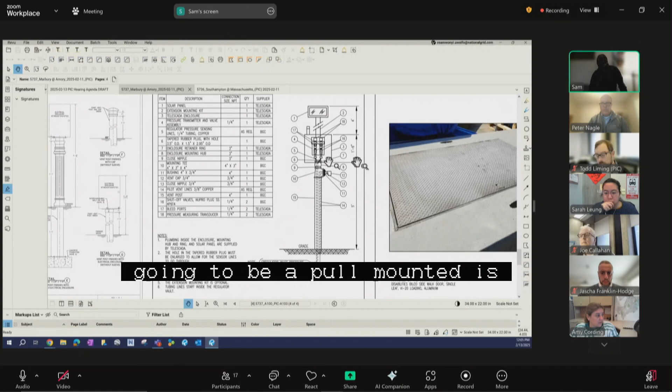But it's going to be pole mounted, with a box on it, and from the floor up to the middle of the box is 5 feet from the ground. Do there need to be bollards in front of that pole mounted unit? No. Okay, yeah, the plans that were submitted show bollards there. I'll have them removed.

Also, on the other side of the regulator pit, closer to Amory Street, it looks like there are 2 existing vent posts that stick up above grade, kind of in the middle of the sidewalk. Do those need to stay, or can those be removed? No, those are going away. Great, just note that on the plans too, please.

And then maybe to the earlier question, right beyond this is just a big blank wall of a building. Is it not possible to avoid putting this vault in front of the blank wall, so that we don't impact the fence, the tree, et cetera, at the corner? It seems like just a few feet down the road there's this building, a door, and after the door it's just a cinder block wall. If it just made it past that one doorway, you wouldn't deal with fences or tree roots, because you can excavate to check on the tree roots, but you're going to find them. And then it becomes a question of what happens, because if you cut through them to install something large subsurface, it's likely to have an impact on the tree.

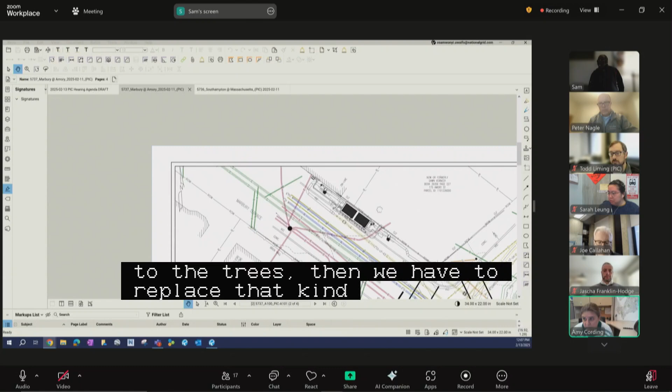Is that easier than sliding it down the street 20 feet? My concern is that because of the foundation of the building, we're going to have the vault sitting right back to the foundation. We can look at it, I can take a look and get back to you on that, Amy, before the next hearing, and get one of our contractors out there to assess it and report back to you.

Sounds like there's some dialogue to happen on this between now and the next hearing, but I appreciate everybody being willing to work with us on this.